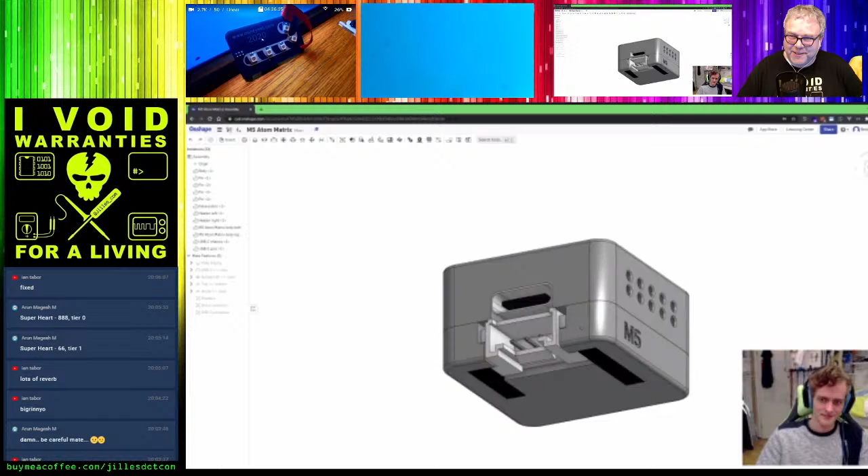Reinier already featured in earlier streams. He was watching a lot of streams, but at one time Boss Sebastius was designing his thing, and Reinier thought, I can do this much better. So he picked up his own gear and started creating exactly this one. Before the end of the stream he had even a better model than we featured at the time. But it's fixed, thanks Ian for confirming.

Really value that. Reinier, could you introduce yourself?

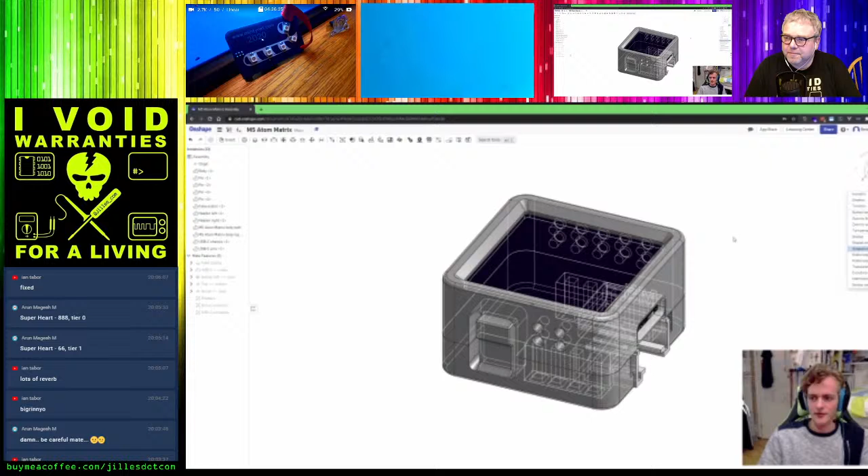So, okay, we have an object, in this case an M5 Atom, not sure where I left it. And then, well, how do you turn an object into a computer model? We did it the easy way, we just downloaded a 3D model and turned that into the device itself, I believe. And you made it entirely from scratch. Yeah.

I thought it was a nice challenge, and then in the end I thought, I've come this far, I might as well finish it. So it's not that many steps, if I may say so, but the art is in dissecting a model into small steps to make nothing into a 3D model.

You'll see in a second how such a process works. In this case, we're going to design something from scratch, but here it was also a lot of measuring and making sure everything's accurate and looks accurate when you render it. And then in the end, there's a lot of different components.

You turn all those components - the Grove connector was a model in itself - into an assembly, which is basically: this part connects to this part. They may have or may not have freedom of movement in certain directions or dimensions. By specifying those, you can make a model which can be pulled apart like this, and then put back together neatly.

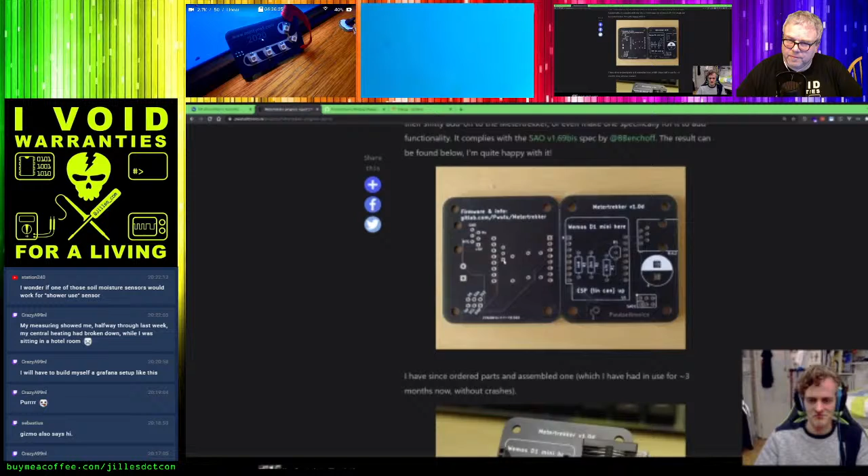Yeah, and then it's a lot of code, which I actually spent most of the time on configuring, to get a telegram and then parse it, but also verify it, because the telegrams containing the data from your meter contain a CRC verification. Oh, cool. Which means that theoretically you can verify the content of your telegram and see if it's correctly come through. Because in the beginning, as you may probably have guessed, this setup is not very fault tolerant. I had a lot of garbage data coming through, and the verification helped a lot with filtering that out.

But unfortunately, some early versions of DSMR, which is the standard that specifies the serial protocol, do not contain those verification tags. So those are a bit more wacky. Once the verification was working, it's just iterating and working long term and finding issues, and you're debugging multiple things at once.

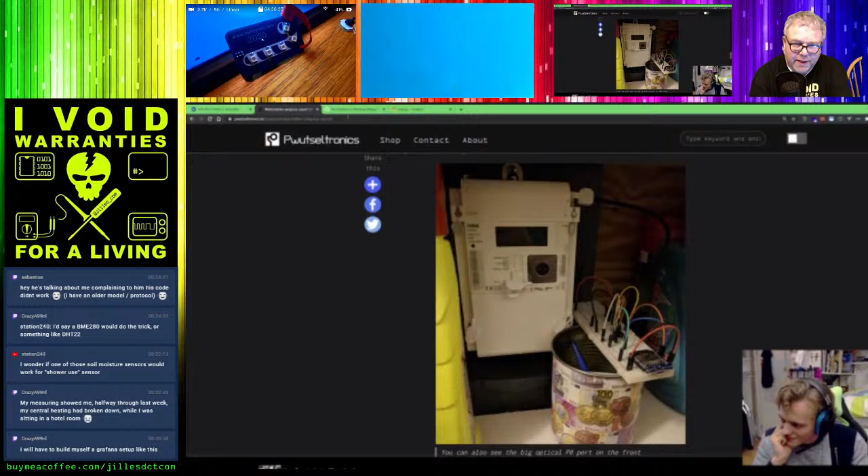Station was asking if you could use the soil moisture sensors, like the thing to see if you need to water a plant, as a humidity sensor, but Crazy already replied to use the BME or the DHT. I have the same thing.

With breadboards, I really love them, but over time, wear and tear, different Dupont cables, extending pads, turning them into a capacitor - it really introduces other problems. As soon as you make it definite, by either using an experimental print or designing a circuit board, all these problems vanish. That was a really big thing indeed. In the beginning, I thought this would never work reliably because of the amount of errors I was getting, but just turning it into a PCB helped so much.

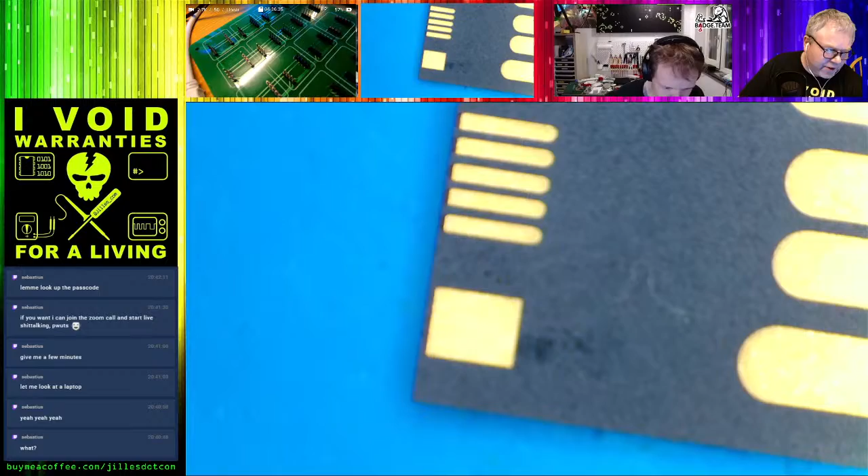I had a lot of fun a few days ago repairing someone's USB stick thing. It's recorded, I hope - I have it, but I need to rip it from Twitch and put it on YouTube. But the gist of it is swapping a controller sometimes works.

So Pwuts, do you want it in your email, WhatsApp or Telegram? Is Telegram okay? I can just chuck it in Telegram. Fine, cool Pwuts. Good to hear your voice, Sebas.

Why does the flip dot behind you never move? I normally don't run it, I can switch it on if you like. I normally don't run it because there are still some bugs to be worked out, and I'm fearful one of the bugs will cause a condition which will burn and cause smoke. But here you go. Whoa, and it's also pretty loud. Yeah, I got that from your sound.

But yes it moves - is it remote controlled? It's currently just on one of those IKEA Trådfri relays, so I can just switch it on and off, and it just does Game of Life. But it has an ESP32. At a previous point I just had a smaller panel in a frame where I could play Snake and other stuff on it, so I'm hoping to get back to that, but not at the moment.

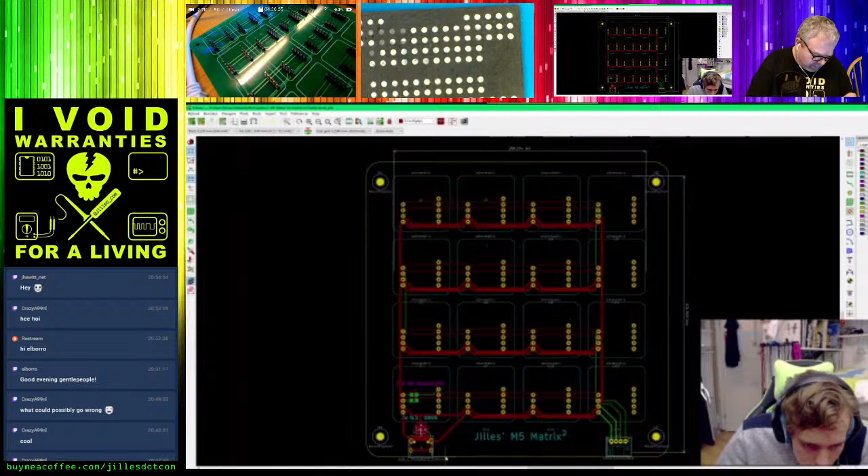Okay, so this one is. Hey Joseph, welcome. I saw you had some cool circuit board coming in for your new war driving thing, is it working already? I did not have time to read up on it.

So on the top it's 6 millimeters, in between it is 4, on the sides it looks like 10. And on the bottom, well first I'm going to make a square of. Let me see, you need the entire size? I already got it, I think, 130. Yeah, 130. Your PCB works, cool.

Still haven't got the package with the stuff right. For some reason sending stickers over to the UK takes just a couple of days, but sending a package will take forever. Yeah, but the UK mail is not the fastest internationally. Royal UK mail, yeah.

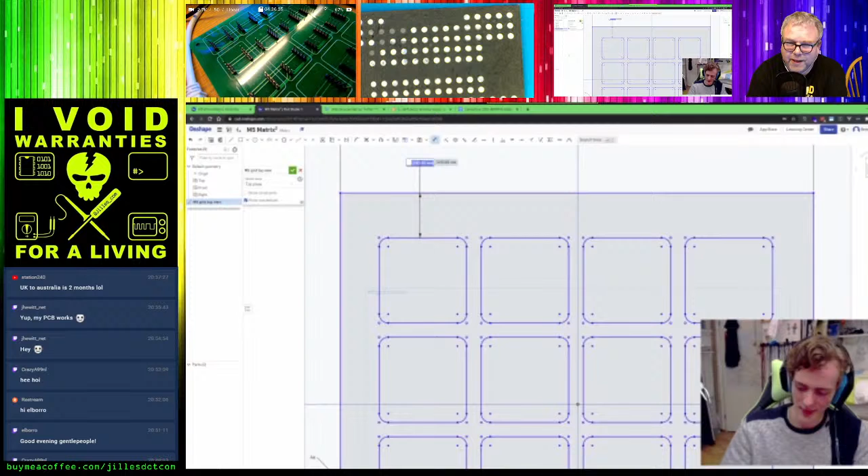I'm not sure what the paid licenses cost, but that's not really my concern. You can use the free version for simple stuff, but don't design your vault in it, not unless you have a paid license. But then again, if you're designing a vault, you can probably afford it.

It's sad that we're getting good open source and free circuit board design software, but 3D CAD is yet another completely different ballpark to play in. I haven't found any open source software yet that can do stuff at the level of Onshape or Fusion, or any boring Windows tool. Too bad. It's getting there, but it's just not done.

I don't mind paying for stuff, but needing another subscription for things adds up. It's like the same thing with streaming: you used to have just Netflix, then it was HBO, then Amazon Prime, and now Disney, and it adds up to something that's not funny anymore.

Besides the subscription model, which makes sense sometimes but not always, the main thing for me is I want to share my projects and be able to access my work ten years from now when the software company has moved on. With open source software, you can just keep an older version and keep working with that.

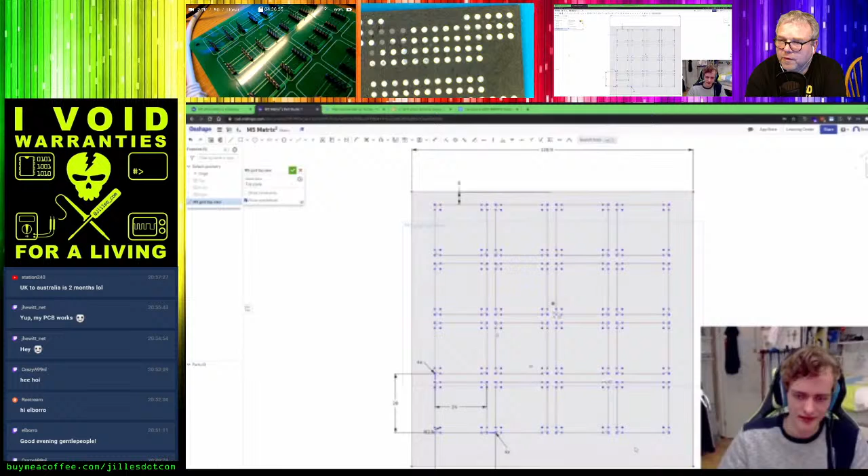So I'm going to move myself out of the way again because I'm blocking my view. Now I'm going to do a trick—not really complicated, but still important. I want this to be centered. Of course, you can center the grid and center the square, and align them along a common axis so they are both centered with respect to each other. You can also use construction lines, which I'm going to do.

So are these grouped? The grid of squares is grouped, but other than that, no, they're not grouped—you can see I can move this around. Now I'm going to fix that by adding constraints, construction lines, and dimensions. This construction line isn't a line that divides two parts of a surface, but one you can assign dimensions to. In this case, I'm going to add a construction line on the other side as well.

Then I can just say these two need to be equal. Okay, and that centers the grid of squares within these boundaries.

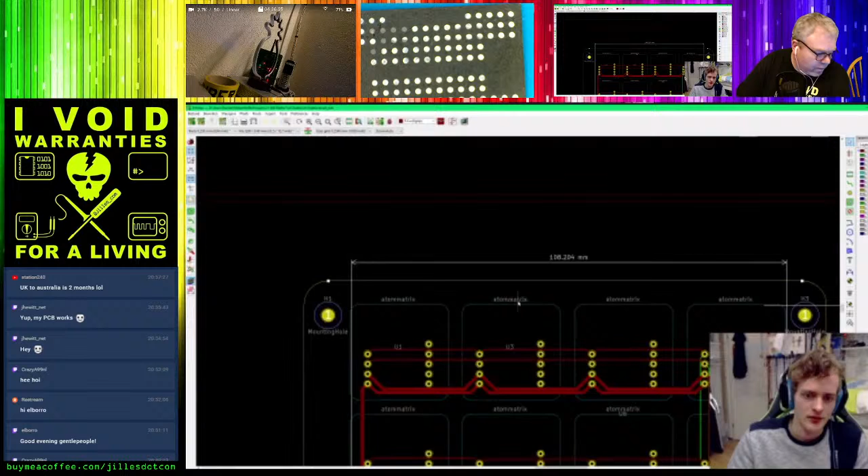Sorry, Rainier, Jilles, do not trust the symbols I drew on that PCB. The pins are aligned, but the blue lines are rough estimates.

Let's see, I want to know what the radius of this corner is. It was 6 millimeters.

So what is a good way to measure the radius of a corner? Usually I just do it freehand. Put the caliper on the, well, is there something I can demonstrate with? You basically put the caliper right here at the point between the straight line and the start of the curve. Then I measure from this edge to that point, and round to the nearest logical number. Often that gives a good estimate or good measurement. So like if you get 2.45, make it 2.5, and it's probably correct.

There are also tools available for this, probably called a fillet gauge or something like that. You can just buy them. I'll have a look, and if I find any, I'll put a link in the chat.

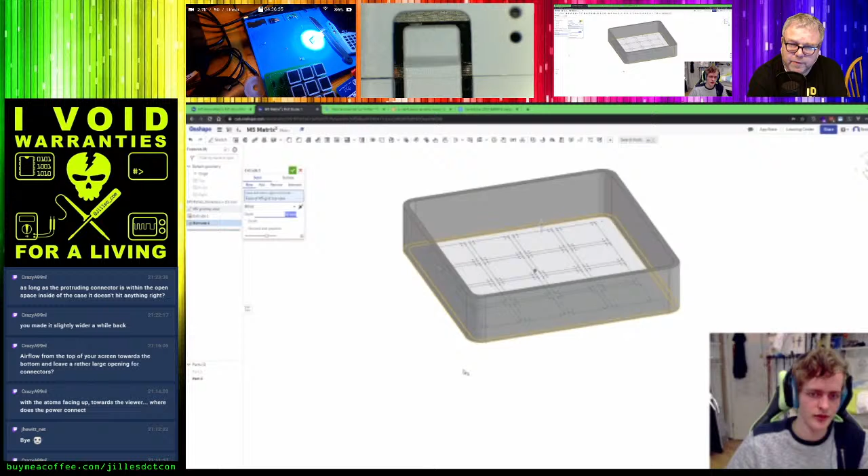Okay, I could probably better name these. So, bottom surface. It's not always necessary, but good for future reference.

I've hidden the bottom part, and I see it's not attached to the part I already had. So you can either create a new object with this extrude, or you can add it to an existing part, which I want to do now. Making it one thing. So now it's one part.

And then I'm going to do another extrude. Now just this surface, the grid with the holes.

Yeah, and I want it to be - well, let's see, starting from the surface we need, say, 2 millimeters space below the PCB. Then how thick is the PCB? Oh, whoops. 1.7.

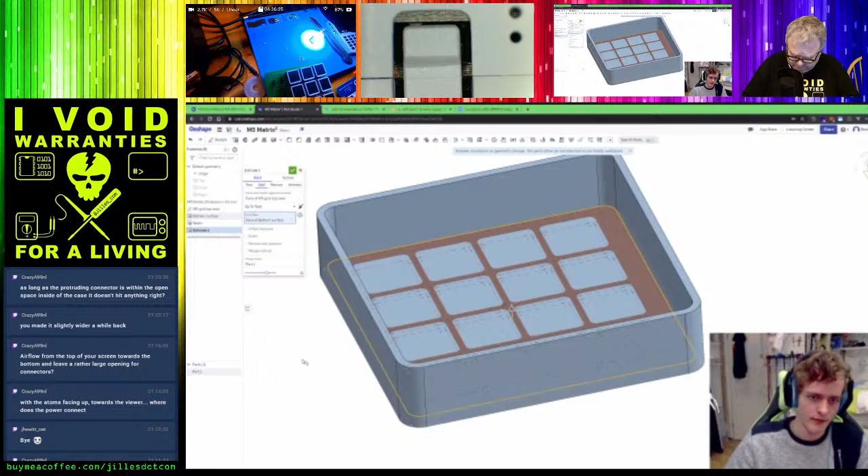Did you take the spacer into account? What spacer do you mean? The black part, so if I'm... Oh, the spacers on the header? Yeah. Oh right, how thick are those?

Actually, so if I take it to the top, from the bottom of the circuit board to the top, it is 18.2 millimeters. And that's excluding the bottom parts, soldering joints, and the capacitors. Because it's the black part as well, which is like - but there's also some spacing because it does not entirely fit. So it's 2.5 millimeters.

That is for the black part of the pin header.

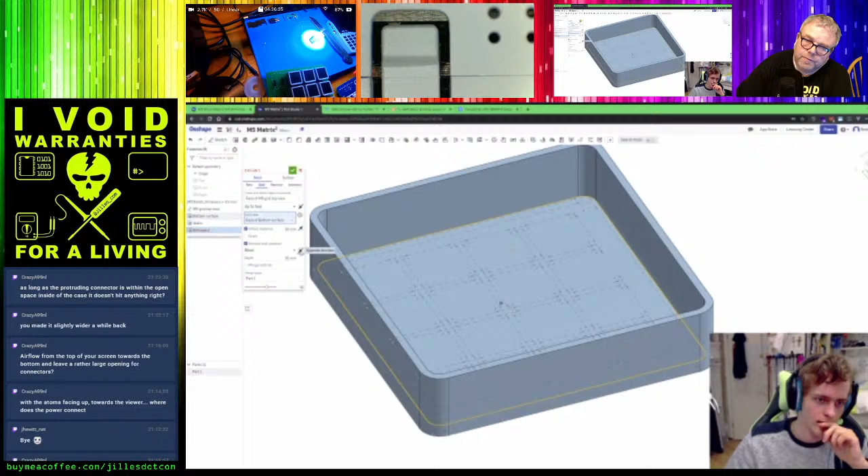I am now trying to get it to do something with the relative distances. Ah, look at that. So I'm just saying, okay, starting from the surface we just defined.

Go up 35 millimeters, and that is the top of this surface, and then there's a second extrude which I still need to fix, because this is going to also be relative from the surface.

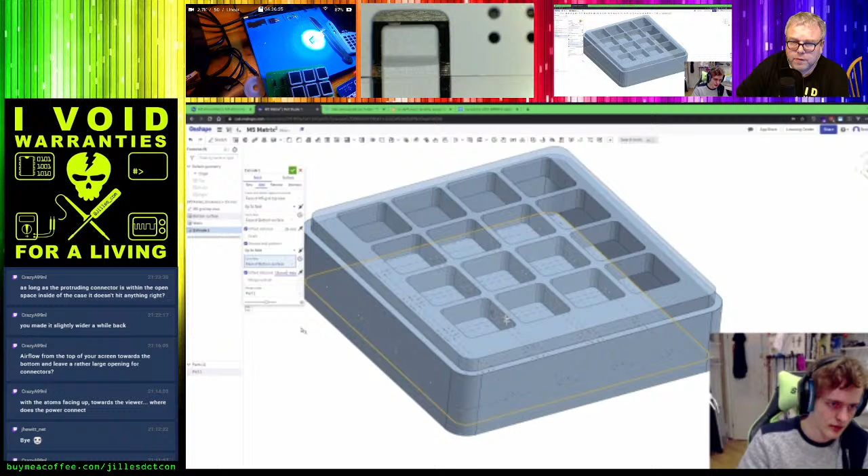And then with an offset of, well, what did we say, 18? So that's 18 millimeters, and then minus the shell thickness. And then this one is going to be just the 18 millimeters, and that gives us the top and the bottom of this surface at the right place.

Now you can see that I extruded the walls a lot too far. So how are you making the top one fit in the bottom part?

Already given that a thought, like having a rail or some clicking mechanism, or I haven't thought of - well, I've given it a quick thought. I think the easiest is to make them screw together. With some extra work, I can also make it a clicking mechanism, but that's tricky with 3D printing.

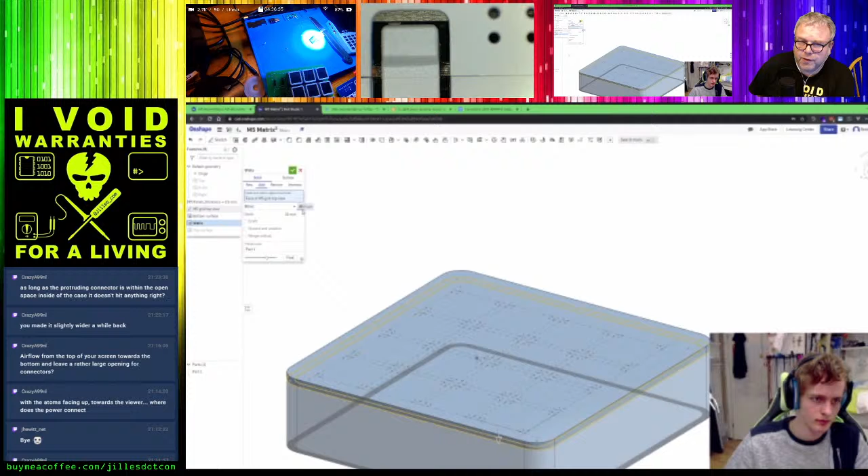Yeah, that will wear out. So it does wear, yeah. But if you are going to screw it, then it should not be screwed into the plastic, but you need to do it like a bolt and nut type of way, so that you can disassemble and assemble it without wearing out the plastic parts.

Well, there are these metal inserts you can use for screwing. Oh okay, yeah. But also, depending on the material and the exact tolerances of the screw holes, it is possible to use wood screws in 3D printed plastic. It may be a bit tricky with harder plastics, but I've done it on multiple occasions and it does work.

Yeah, but I expect that you need to take it apart quite a few times. Yeah, so in that case, metal inserts for screws might be a better idea.

But as you can see, we now have a very basic shape. And then you can, along the edge, add something to clamp the PCB. Yeah, I think it's easier to just add things to screw it to.

Yeah, you could screw it to the bottom plate, or like there's already 4 holes in the circuit board itself, or you could use a rail on the top plate to fixate it, to put it in place, like having some sliders to the side.

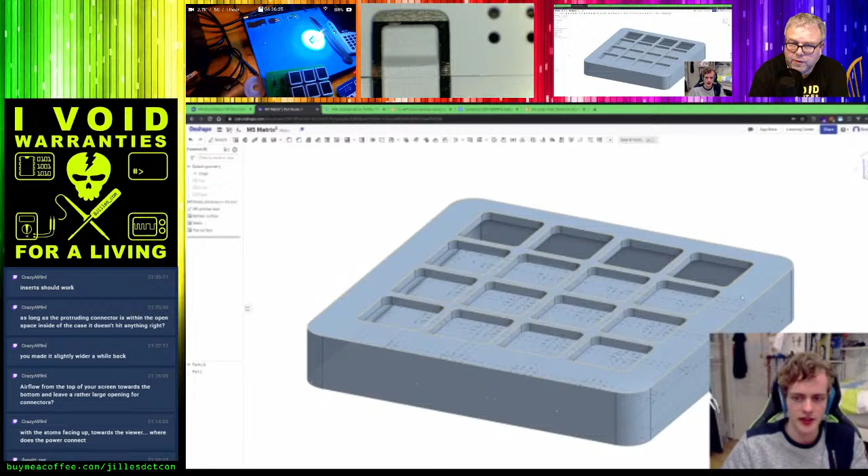Wait, you mean like something that goes over the top of the PCB to keep it down? Or so what is the top and what is the bottom? Is the bottom part being screwed, or is the top part? Yeah, I expect the bottom part. Well, it depends on what you want. Yeah, okay.

I would suggest having the bottom be the base, and then let the top be something you can take off. So if you take the top part that's removable and add some rails to that, around the edges—like 4 edges or around every line on the sides—that would keep it in place. Otherwise, you'd need to screw them on the top.

First, I think I'm going to split these into two separate parts, so that you have a top and a bottom part. That's probably easier for tinkering purposes. You could also use cylinders on the top part that would directly screw the bottom part to the PCB, so you have poles sticking out of the top part, and you screw through the bottom part through the PCB into that. Yeah, that's also possible.

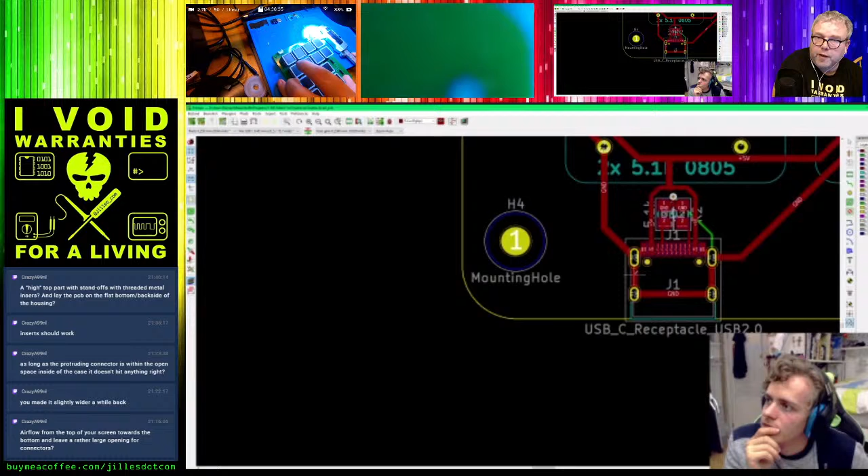Let me show what I exactly mean, because things might be lost in translation, as I'm probably not using the right terminology. So I'm measuring like this. I think I've got it—from the center to the top, and probably also to the bottom, at 8.75 millimeters. Oh yeah, center. Let me check here if it matches somewhat. Oh, it seems to be a bit different here.

Crazy states a high top part with standoffs with threaded metal inserts, and lay the PCB flat on the bottom backside of the housing. Yeah, it cannot be laid flat on the bottom—you need cylinder top parts on the bottom as well, since there are components on the bottom. So you need standoffs on both the top and the bottom, and make sure the PCB fits between that, with respect to the dimensions, so that the height of both standoffs plus the thickness of the PCB is equal to the space between the top and bottom surface in the model. Yeah, make sure it fits.

Is it fit on the—so the top part needs to be on the top, so it should not be an inlay in the top. It should be on top, otherwise it won't hold. Wait, are you replying to the chat? No, I'm just thinking out loud. So the top part is not only a flat part, it also needs some sides to align to the inside, right? Yeah, so it won't misalign.

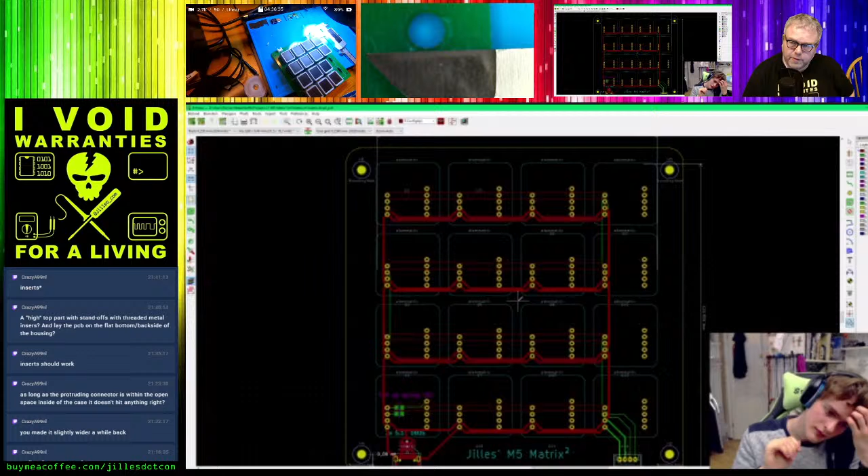I'm trying to design this housing such that the PCB fits exactly inside the walls of the housing. That would mean the alignment is done by the walls, and then you have the standoffs for fixation. But that would be harder due to parts sticking out, like the USB-C and the Grove connector. What do you mean harder? I mean, if the PCB is at a fixed position in the housing, then I could just create holes in the housing so you can access the Grove connector and the USB-C connector.

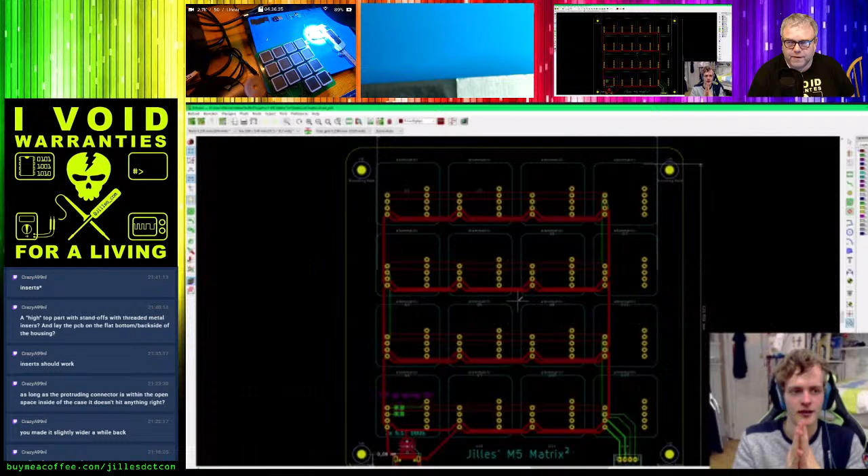I thought you centered it by aligning the walls against the outline of the circuit board, but that's not the case—you're aligning it using the screws and cylinders. Well, yeah, it's kind of both. If designed correctly, they should both fit exactly. There's of course a bit of tolerance, but yeah. I think it works for the sides, but the bottom part—yeah, you need to have a cutout on the connectors, and then...

So let's see, this is the center point of one of the screw holes. It's 8.75 millimeters on the top, and it's—let me see—smaller from the sides, 5.95. It doesn't come that close, but hey, why not. And Crazy is stating that the USB connector might actually stick out of the box, so it's not only the connector, but also the connector that's put into the connector.

So the bounding box with connectors is larger than the PCB itself. Yeah, that's true, but that should be solved by just making holes for the connectors, which is needed anyways because you need to be able to access the connectors even with the enclosure closed, for external power. We are not yet designing a battery pack into it, it would need to be quite large.

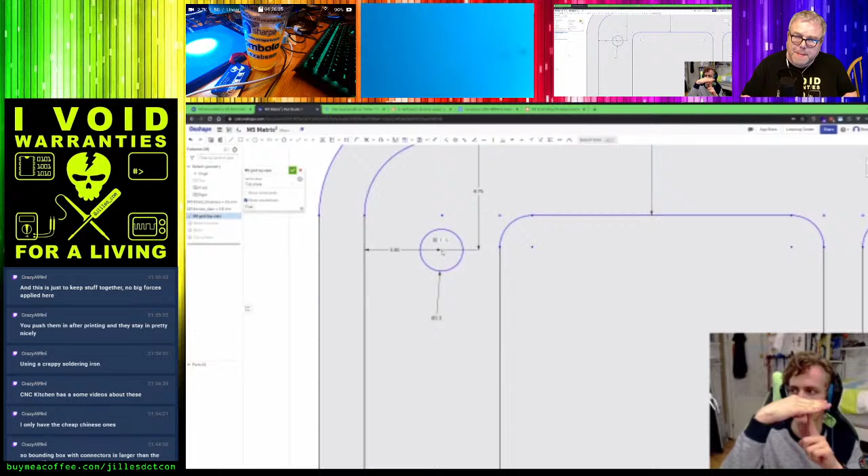Then there's the PCB with the hole in it, and then there would be the standoff with the insert in it, which you screw into. Then we need another circle on all 4 corners for the actual pole of the actual standoff.

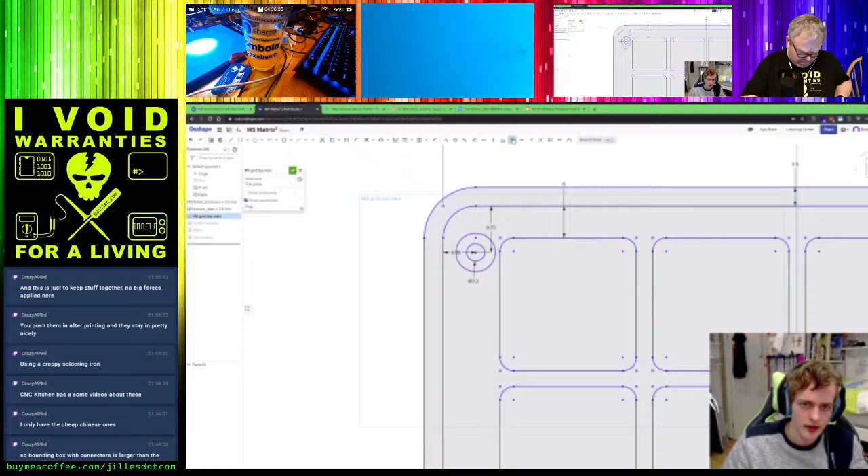Okay, so I think I got it now. On the left side they are 4.5, and on the right side they are 4. What dimensions are you? That's like from the outer side of the circle to the outer side of the board.

Wait, then it's not symmetric. It's not symmetric, huh, interesting. Oh, I can also see it in the drawing now. Huh, okay.

I mean, it shouldn't be an issue, but then let me see where the difference is, because measuring from this outer circle to this corner, I see an X difference of 2.08 millimeters. And then on this side, from this corner to the same circle, it's 1.12. So it's probably there that the difference is.

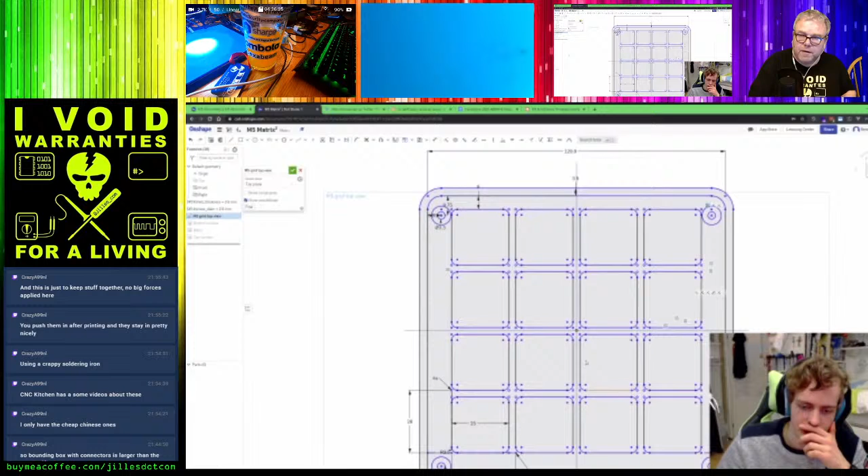That might also mean that I cannot assume everything to be centered. Okay, so we can just delete these because they're not useful anymore. No.

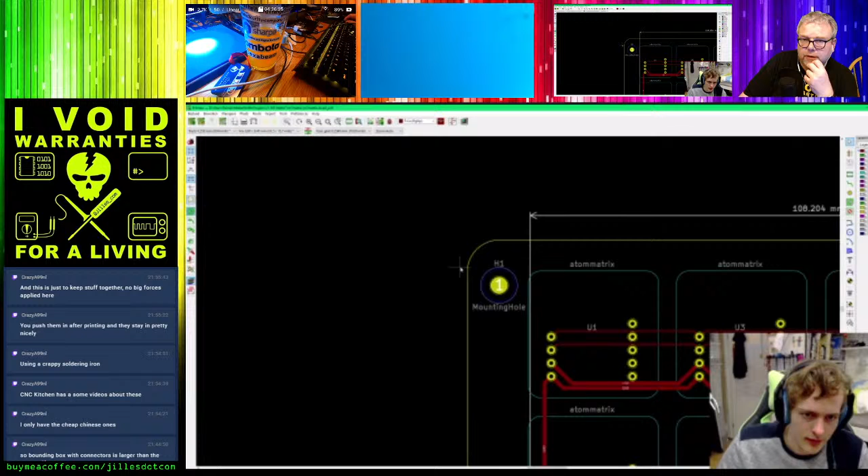So if we let go of this and just look at the outside of the board. Okay, so I need to re-measure the placement of the holes on the right, because the holes on the left are still accurate. I use those for reference.

Yeah, so these are going to be at x 5.33 from the edge, and these are 5.95. Yeah, no, those are not symmetric anymore. And this one isn't either. These are aligned though, perfectly.

And then I can just redesign the PCB to make it all symmetrical, nicely centered, whilst Sebas isn't looking. Well, I could, but then the PCBs that have already been fabricated wouldn't be of much use, and shipped and set up.

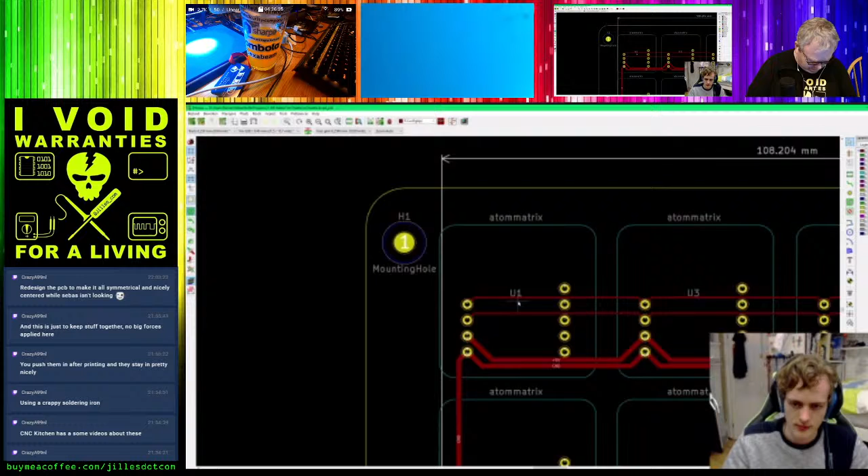But on your PCB, are the M5s within the lines? Yeah, but they are more to the left. So yeah, they are within the lines, but they are to the bottom left. Okay, so there's some spacing left on the top and the right side.

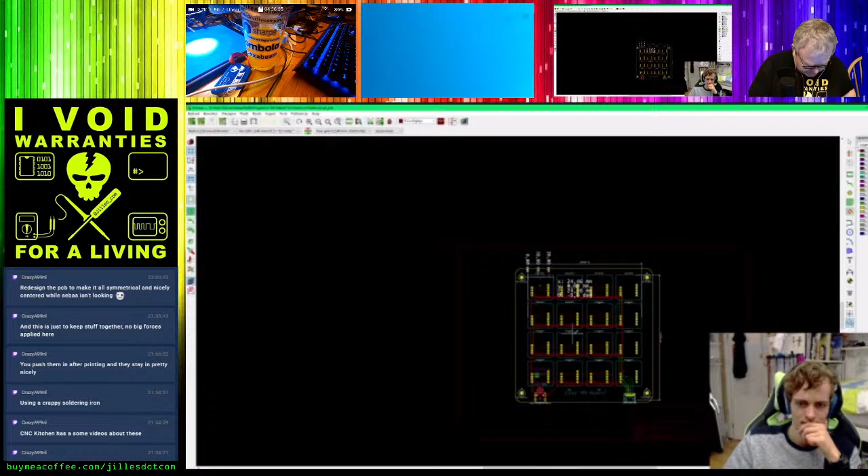Well, then it's a bit hard to use these files for reference because apparently they're not exactly accurate. How large is the difference? Yes, really tiny, like 0.5 millimeter. That shouldn't be too much of a problem, I think, because that's also more or less the tolerance. Yeah, 0.53.

So then I am going to take this distance, which is 9.91, and this distance, which is, well, what is it? And just subtract some. 11.37. And then this should be around about 11.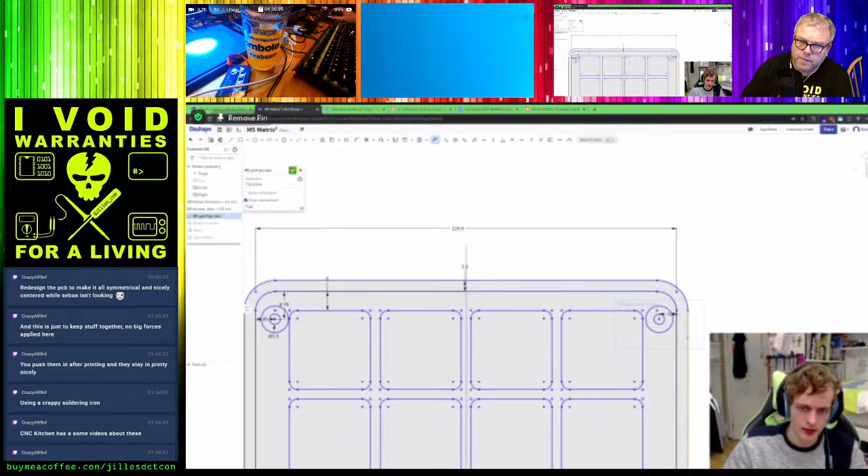Now this is of course just kind of guesswork, but part of the trade. And then what's the distance we come out on this side? It is 9.9.

As you can see, working from an existing object or design is a lot harder — a lot of constraints and not that much actual drawing and designing. No, but these are like the real life challenges. So if you know that you run into this at the end, then you think about designing your circuit board in a different way. Yeah, definitely.

So I was not thinking about this as well. Like for me, symmetry was all about beauty and not about 3D prints. Yeah, but symmetry, it's aesthetically nicer, but it also helps with designing. Yeah, I understand, it's that simple. Yeah, and I think this entire process makes it even more clear.

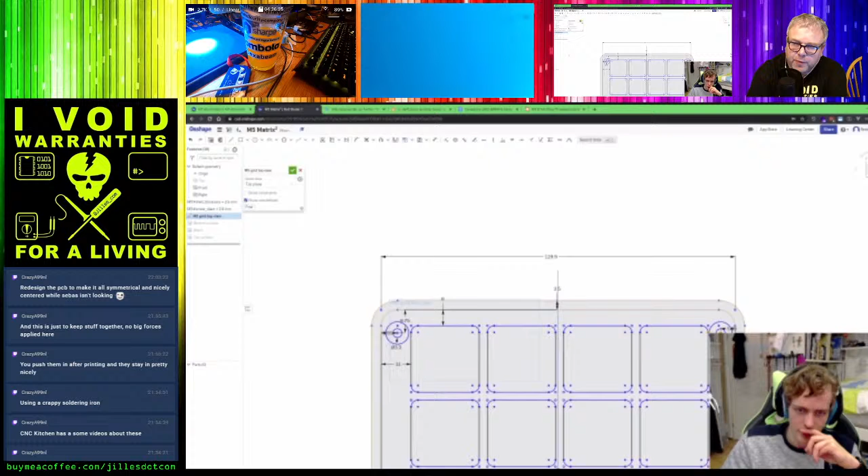So you have not much space between the cylinder holding the... yeah, that's not that much of a problem. I mean the holes that are in here are for the screw that goes through the bottom. And then I actually still have to draw the circle for the inserts. Might as well do that now.

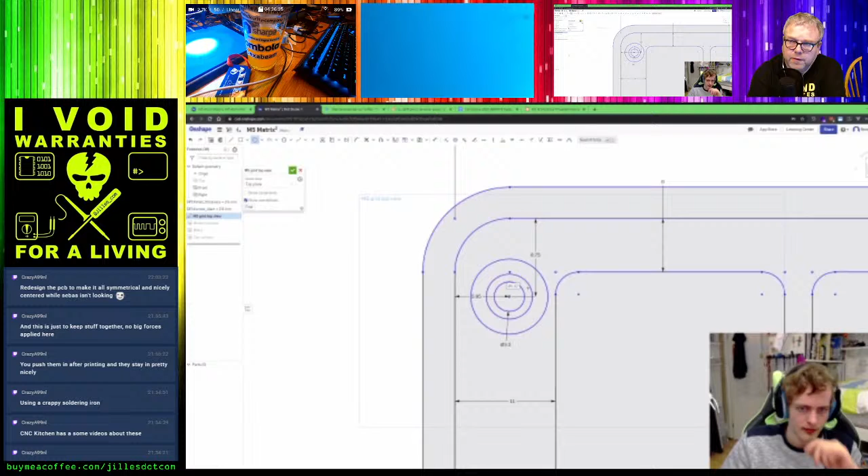Because the inserts are, well, it said it somewhere here: 4 millimeters. So it's not that much difference. And it's an M3. So I'm just going to assume these inserts — can of course change later — these are... I actually have some inserts lying around here, 4 millimeters, they say, suggested hole size. So I'm just going to do that.

As you can see, these are going to be a lot of concentric circles, which is a pain to select all the surfaces when extruding, but it's just how these things work. I'm going to select one circle and then all the others to say, okay, these should be the exact same radius.

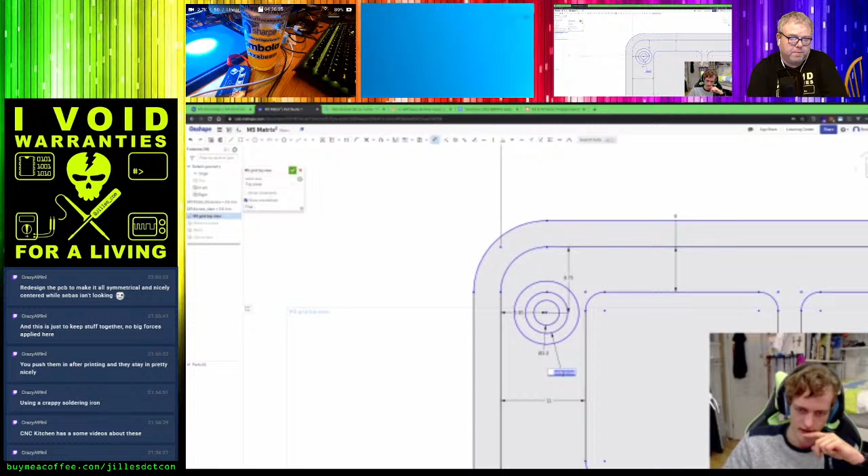And then assign a radius to one of them. I think I'm going to do that here as I've done with the others. That's going to be 4 millimeters. So as you can see, there's not much of a difference. I think I'm going to make it a little bit bigger because often 3D printers make their walls a little bit thicker than in the design.

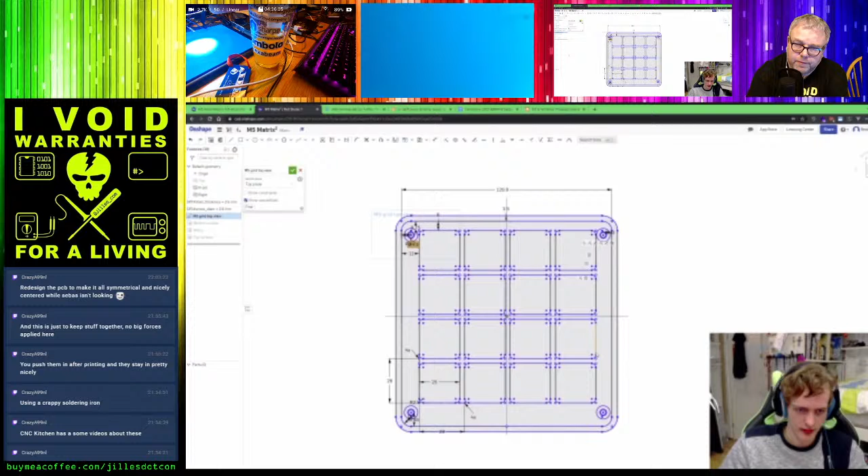Well, the diameter of the balls is not really that important for definitions. It's important that it doesn't intersect with anything else. But right now there is 0.6 millimeters distance between these two, and that should be enough for tolerance.

And what I can now do is, well, first show you what happens when you edit the sketch on which an existing extrusion is based. So I'm now going to have to select all the extrudes and add the missing surfaces.

So this is the bottom plate, or this is the top plate? Bottom. This is the bottom.

To prevent this, I could have made a new sketch on this surface, so I can just extrude everything in the beginning, and then later make a more detailed sketch for the holes and fix that. But in this case, I wanted to simplify the extrudes themselves by extruding everything at once and then splitting the two halves. Makes sense, it's a design choice.

Neither of them are ideal, but they both work. So you need a hole in the bottom as well. Oh, that's a good point. Actually, I should remove the material from the inner hole at the bottom part.

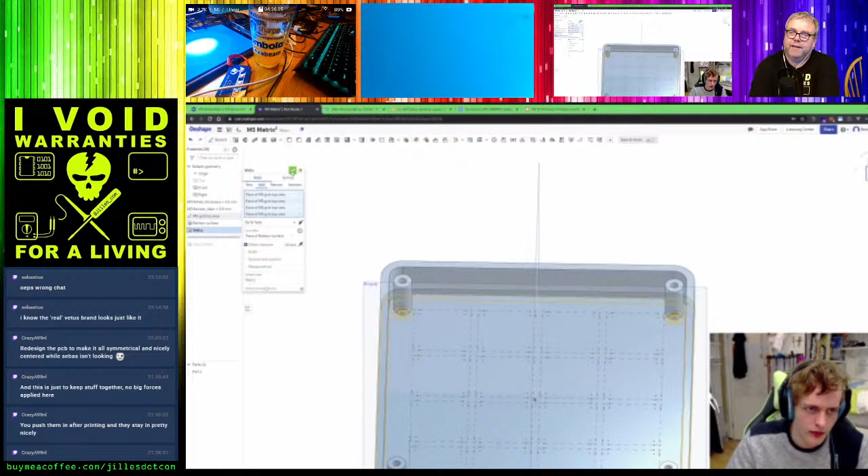Cool, so we're now going to add the standoffs to the wall extrusion. And then you can see that you have four little holes in the corners. Very cool.

And you can, of course, now they're still joined. This is the point where I am going to see if I can offset the... let's see. I want to duplicate the surface at a distance, and I think this is the right button for that.

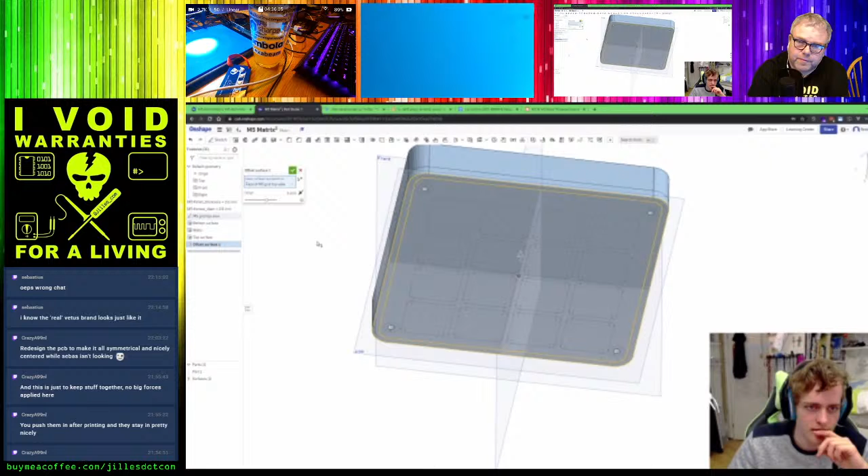I really like how this comes to play, all in now we're over 2 hours. Yeah, really like the process. Bottom surface.

Okay, so these are the surfaces that need to split, and then you need a cylinder on the bottom part as well for the distance of the circuit board.

So now we have... oh crap. What? Since I selected only these 4 circles and the wall, they have now been created into 5 separate surfaces. Okay, it works, but it's not convenient, so I'm going to roll back, delete that. It's possible to deselect, to disable certain parts or layers to prevent this from happening.

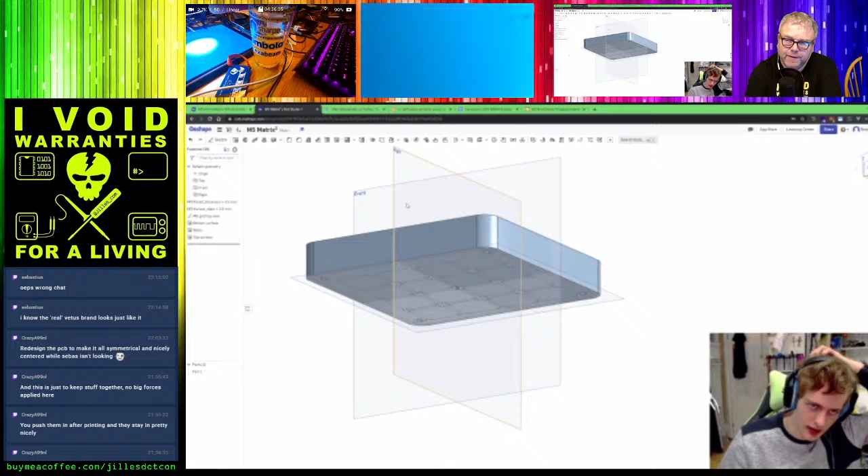Oh wait, this is again not exactly what I wanted. Yeah, this is more like it. I would like to offset this entire surface. Look, and now it's just a surface, because just a moment ago I was moving the entire face of the bottom up, which meant the part just retracted. And now I am creating an extra face.

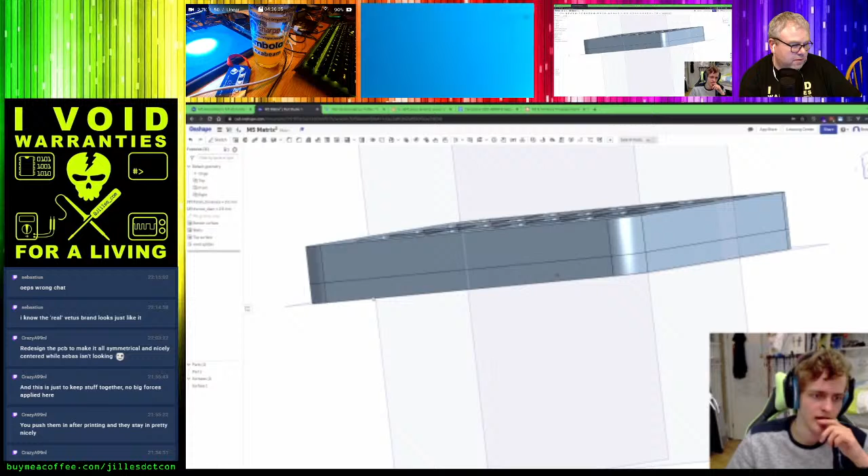So that's going to be shell thickness plus 4 millimeters, we said, which gives us basically a tool to split the housing. And now we can do a cool trick, which is actually splitting the housing using this part, and the entity to split with is the surface we just created.

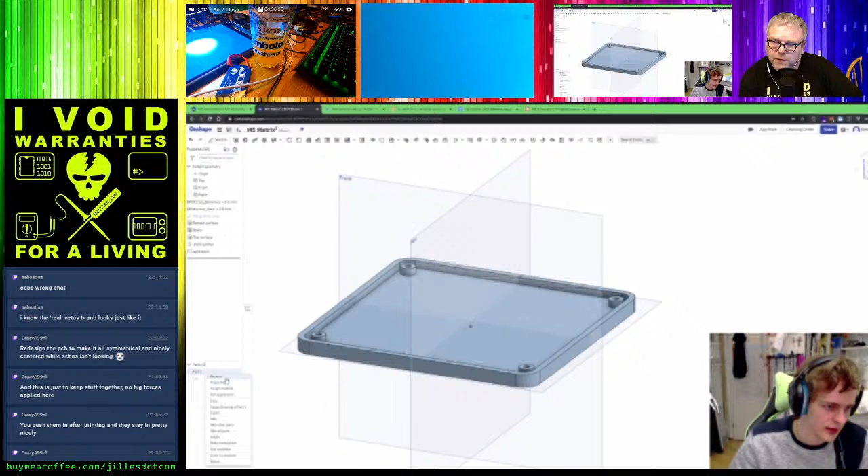And now we have a bottom and the top part, and we can hide one part and the other stays visible. So this is currently the top and the other one is the bottom, and now we can do what I was just doing incorrectly.

And say, where was the button again? Move face and select the 4 poles, and then what was the thickness of the PCB? 1.5. Okay, so I can move these the other way by 1.5 millimeters, which gives space for the PCB.

Now, how much do you still have left for the bottom part? 2.5 millimeters. Yeah, that's more than enough. Okay.

And then I'm going to create a variable with the thickness of the PCB, which is not necessary, but probably a good idea. PCB, which is 1.5, you said. Oh, oops.

And there. Then I can change this to PCB thickness. Now, of course, there needs to be space for the screw inserts. Not in this part though, right? Right, only in the top part, and it will be held together because the screws themselves are M3 and the holes are M3 as well.

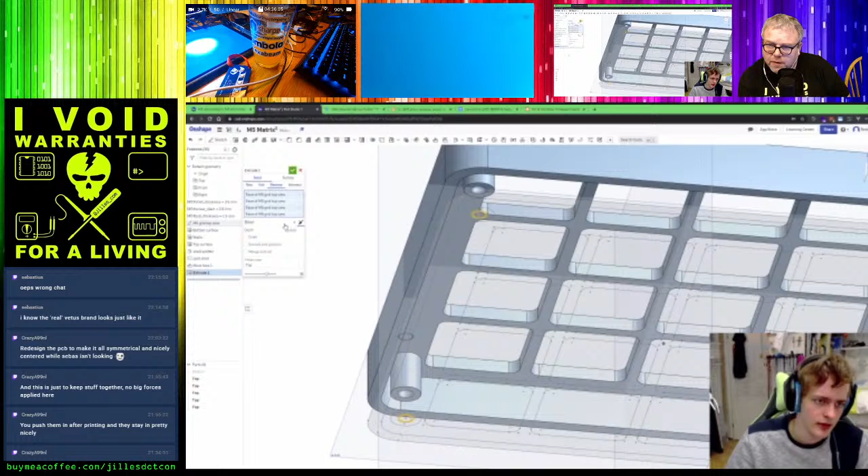It needs to be removed, in the other direction. Up to face, well, up to this face, and then with an offset, of course, because it needs to go in there. Of, let's see, okay, other direction offset. Now we can see it's removing material from in there.

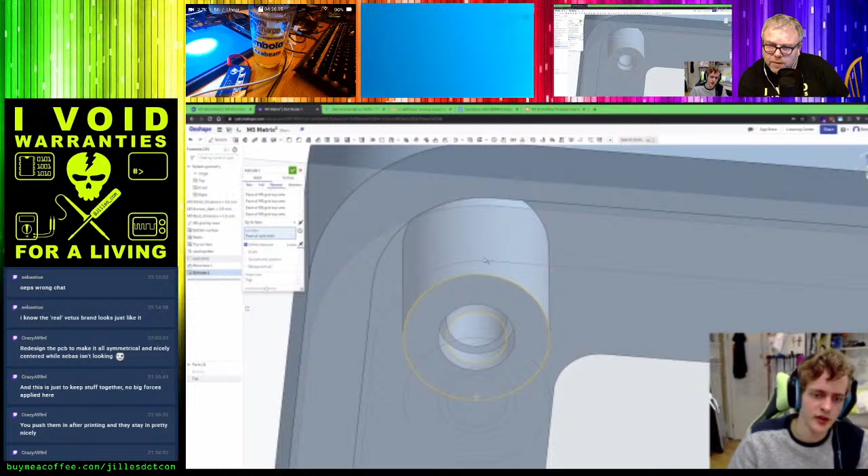What would it be, like 5-6 millimeters? Let's see, at least if it's specified. That's so much more, this should be 4. Then I think from top to bottom it's 6 or 8. Let's just make it 8 to be sure.

Do you have a link or something? Or I ordered a few, I have a box here. I can get them and measure them. Shall I do so? Yeah, sure. Can you also put one under the microscope? Yeah, will do, hold on.

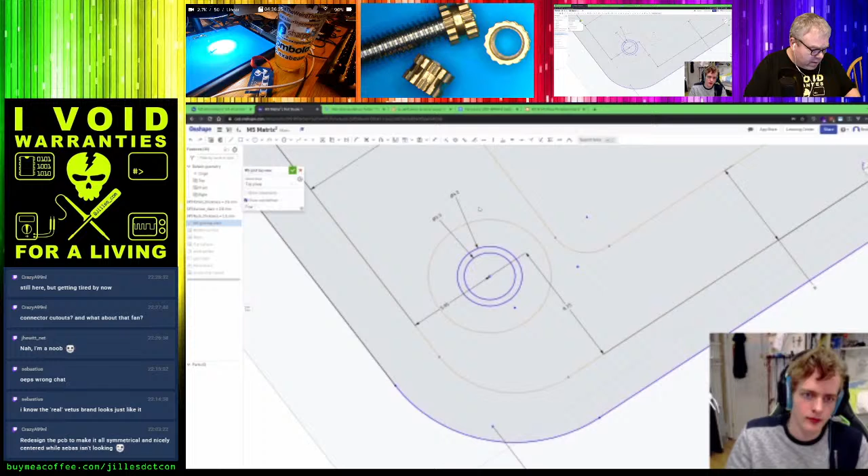And the height of it is not that high, so it's only 3 millimeters high. But then you don't need any insert kind of solution.

Okay, so then this can be. What was the height of the inserts? 3. 3. Okay, so I'm going to make it 3.5.

And then there's space for the inserts. There is an offset on the surface to accommodate the PCB, and there is also a hole in the bottom to stick the screw into. So the bottom and the top part are together. Is there a way to fixate that they do not misalign? Not yet, indeed, but that should be doable. Just thinking of a way to do that, like having an inner line and outer line, or...

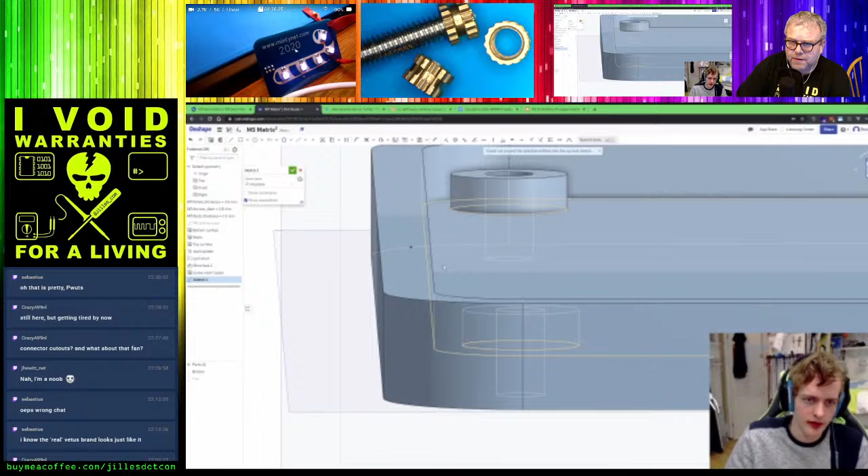Okay, I'm trying to get a reference point, this is probably okay. In my sketch, I'm going to project. Couldn't project, oops. Is one of the sides thicker, or is it just the way you see it? Is the outside line as thick on all sides? Because it looks like the wall should be the same width everywhere.

So I'm trying to get a reference on these lines so I can use them in my sketch. Except they're somehow misaligning - it doesn't really matter, it says could not project. Okay, so this is a useful reference point, and then what I'm going to try and do is make a sketch of a profile I want to cut in the side. Then I think I can sweep the profile around the entire wall, so you get a bit higher part on one side and a bit lower part on the other side. Cool.

Actually, this might be an alternative for splitting the shell. Except we've already done that, so I'm just going to see if this works.

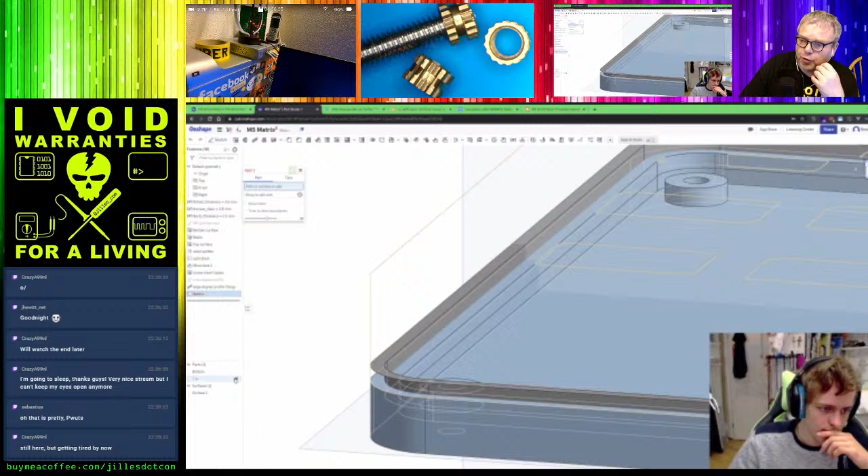So you don't have to do this for the top part as well? I suspect, okay, that I can select these two parts, and then I will just select the surface, and that should, it creates two new parts, so it works.

Liners or whatever, and then let's see what we have here. First, we have the bottom. Yeah, and you can see that it now has a cutout on the side.

And the rest is contained in these three parts, which has a lip. Right? I think you can see. Yeah, okay, so this now has a lip going around.

So we can kind of undo what was just done and do a union. Whoa, clicking all the buttons. Union these three, and we get back the top part. Right? Yeah. And now we have a bottom with a cutout and a top with a lip.

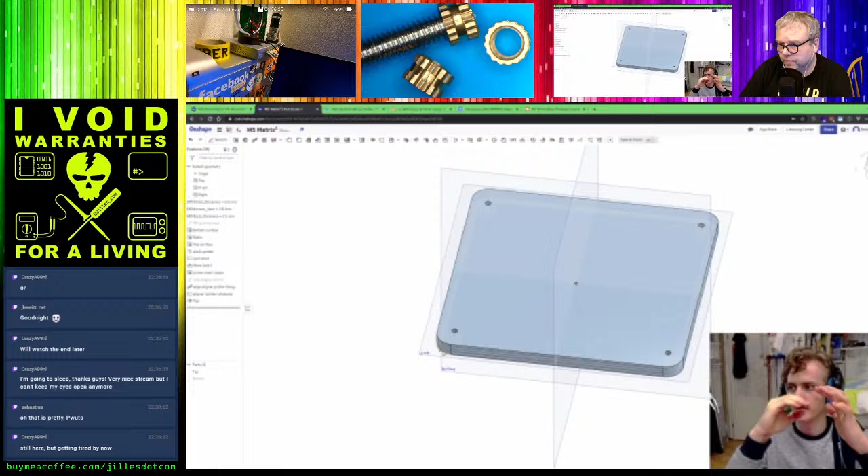Do you have those blockhead M3 screws, or are they like round heads? I'll show you. Oh, they're actually not that clear. These. So what's the diameter of those heads? That's 5.4. And the height is 3.2.

Just going to add more circles. Whoa, that wasn't supposed to happen. Alright, that's quite big. Then you need a thicker surface for the bottom to make it work, otherwise you go through. Because what was the thickness of those things again? 3.2, okay, that's pretty thick.

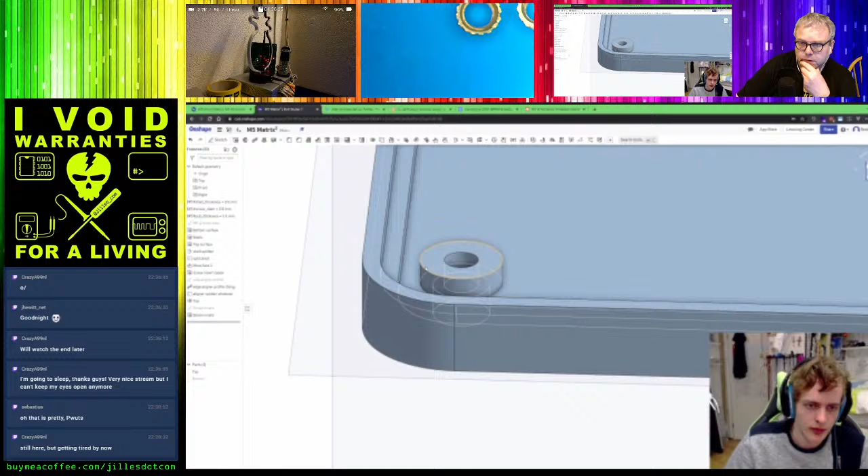It leaves, that's actually 3. Trying to find out what the distance is between the new inner. Okay wait, this has radius. Oh, diameter 8. This is diameter, that's cool.

Using the 5.5 distance as well. So there is 1.75. Oh wait, is that correct? There's 1.25 millimeters left on both sides. Yeah, here and here, between this and this one. So it's probably enough to keep it together.

This should work. So there's an inset on the bottom. Wow, there's space for the PCB on the top. So much detail. Now we have, well, it kind of looks like an enclosure. Yeah, just needs more holes, right? Both for fan and for connectors.

Whoa, whoa, whoa, whoa, what's happening? I'm going to use these screw holes as a reference, I think. Yeah, it's probably a good idea.

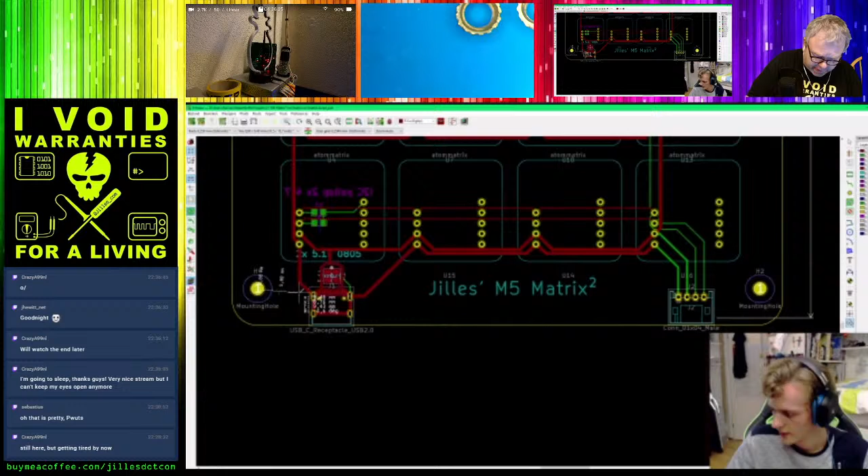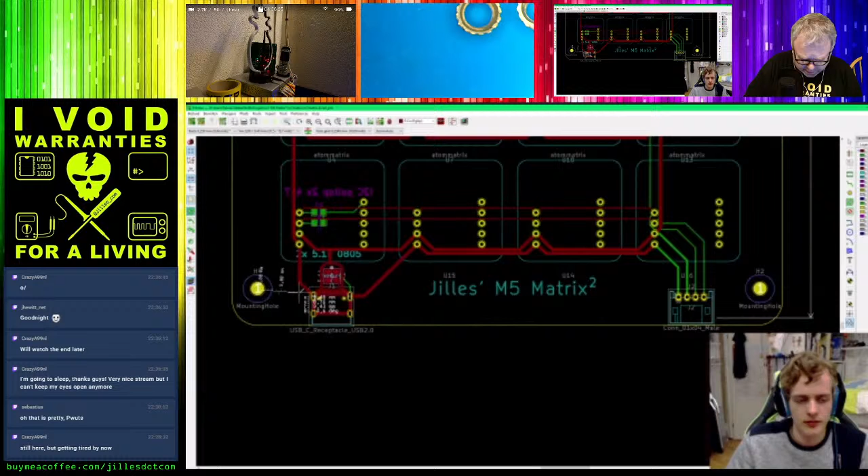Then how much space around the USB-C connector do you need? That entirely depends on the USB-C connector. I have one here, which is 10.5 and 6.5, but that's the plastic included. I would make it bigger as there's different USB connectors, like maybe 2 millimeters to each side.

Round it up. Let's see if I can find the center of this connector. Right there, 70 millimeters from the left.

Yeah, I could do so, but that's something you could use adhesive for. So Elbora is asking, are you planning on something like anti-slip under the enclosure as well? Yeah, there are these cheap rubber or silicone adhesive feet you can just put on there to keep it from sliding everywhere. That's probably the easiest.

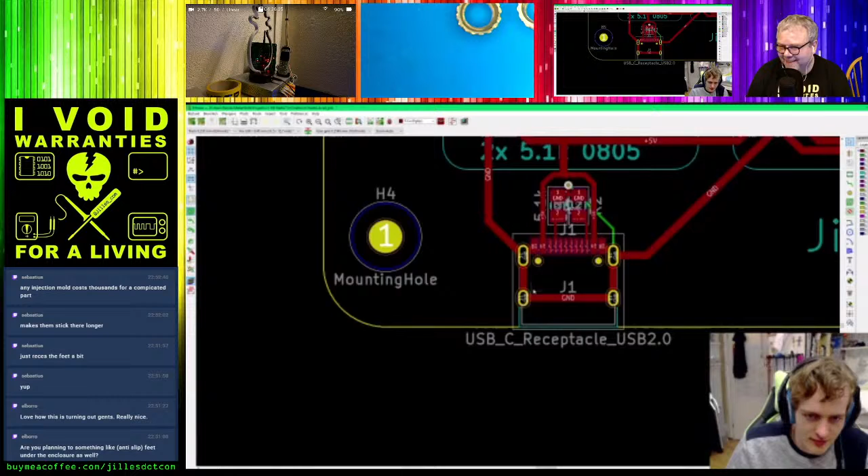Pun intended. Maybe. It's nearly 11. Anyone in the chat for whom 11 means bedtime?

17.5. Okay, so then the distance between these two should be shell thickness plus 4. No wait, the center needs 4 millimeter minus. Where's my? Here it is.

So, okay, this should be the right position, if I'm not mistaken. So the bottom line is the top of the circuit board? Yeah, and the bottom probably... No wait, I'm probably doing stupid things now.

I should use this as a reference for the position, because this should be shell thickness plus 4 millimeters, and that's the top of the piece. Should be plus 1.75 for the USB-C connector itself. Whoa. Yeah, okay.

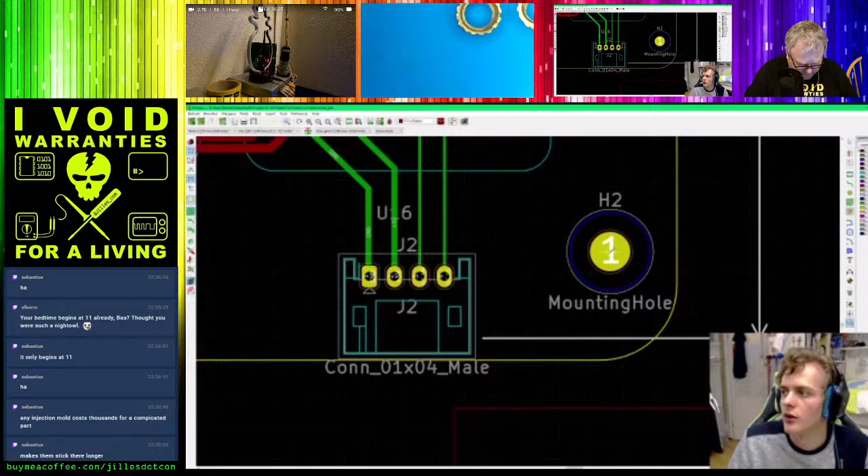Sorry, what? 3.65? 8.6 in width. What is it? 3.56 in height.

Is that for the connector, that part? I think I'm going to go with the outer dimensions of the connector instead.

Which is 10 by... And now I'm including the circuit board as well. 6.8. 6.85. 6.9. 6.9. But that's including the PCB. Okay.

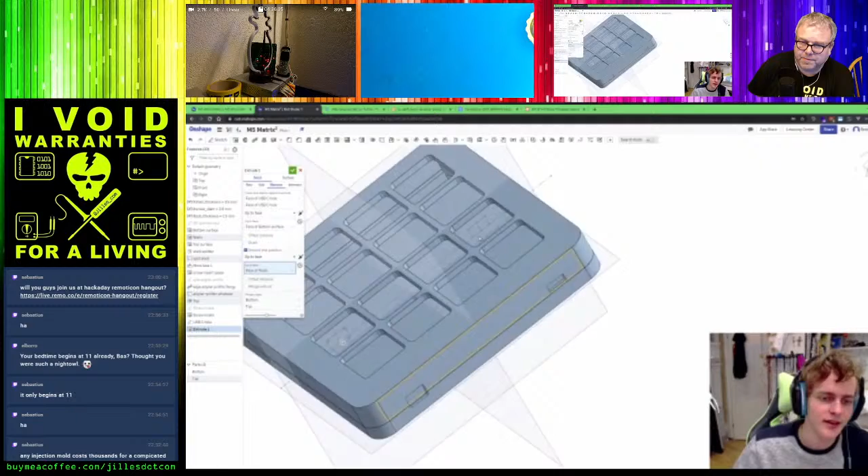And I should probably also define a second end position, which is the other side of the face on the other side, because otherwise if we make something in between here and here, it will just go straight through. It's probably not going to happen, but it would make for nasty surprises in the future and hours of debugging. So to speak.

Ta-da! Connector holes. Yeah, very cool.

So now this is going to be tricky with printing. I would just cut it off. Yeah, I mean the printer will try anyways, but if it fails, you can just cut it off because it's going to be behind the edge anyways. Correct. Yeah, and in the other part, it's just going to be a little cutout.

Now the only thing left to do is create some holes for venting. We can make holes in the back, the side, the top, the bottom. What do you think? I would say create vent holes

along the interspacing between the atoms. So there's 1, 2, 3 interspacings on all sides. Or what do you think for airflow? So there'll be 1, 2, 3 here and here as well, like on the same line as the raster is.

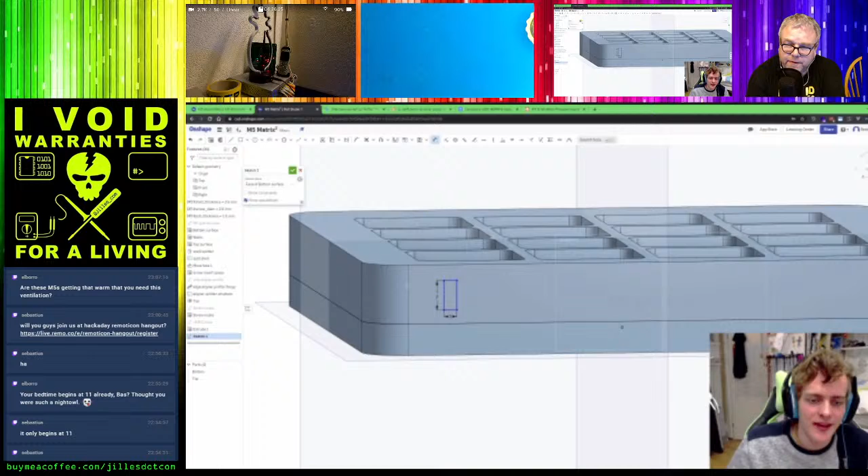Real fancy box. Yeah, I think I'm going to work on it a little bit more after we finish the stream. Anyone watching will probably see it on Twitter sometime in the next days.

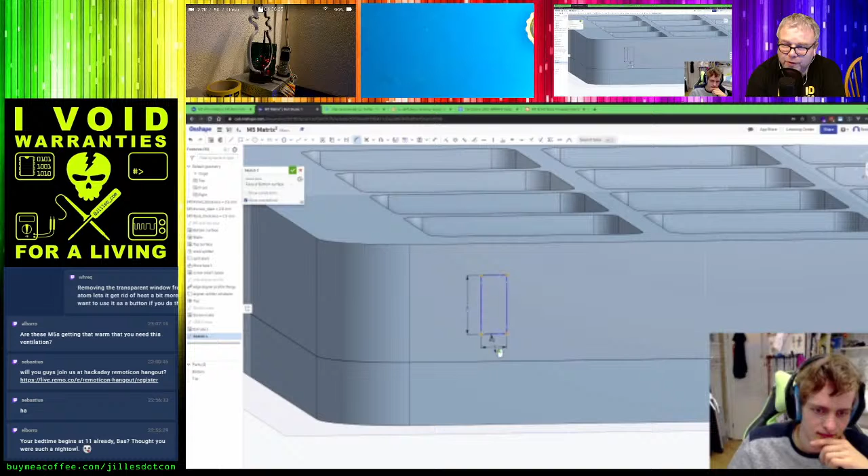So some inlays like we have on the atoms on top would be cool as well, like the tilted inner part. Like if you look at the atom itself, those are not flat on the top. So if you cut them out, have like a similar experience for the inside - not a straight line, but a slightly curved line.

Oh okay, you're saying something in chat - removing the transparent window from the atom lets you get rid of heat. Oh okay, yeah, but then you can't use it as a button anymore. Yeah, correct. Could do that as well.

Yeah, I haven't figured out the software yet, so that all depends. There might be a way to interact with the device by selecting functionality by pressing the button. So I think for now we're going to leave it on. But maybe it will be controlled by a different M5, like a Core 2 with touch - then you don't need that click functionality anymore, and then we can just take off the shields.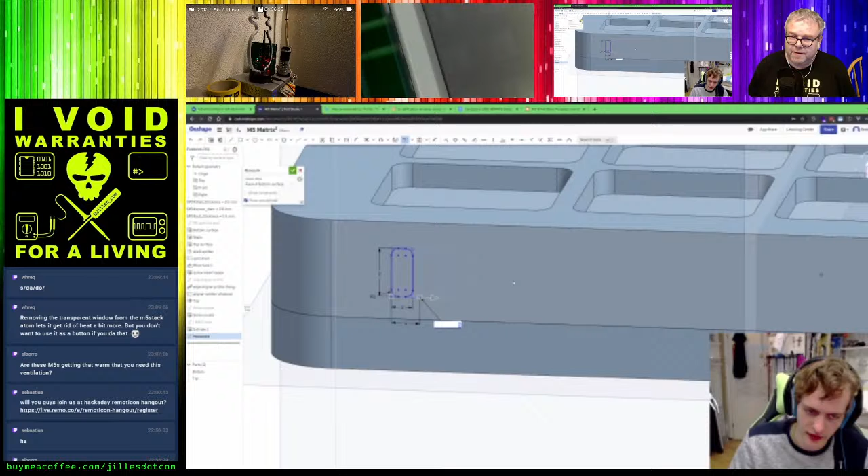Pattern of this, and then - I don't know, it's like an artsy view. How many do we want? As much as possible. Oh okay, so then they end up here. That's maybe a bit too much. A little bit less.

Yeah, you can still use that as a button, but it will also work like for blind people, feeling all the notches.

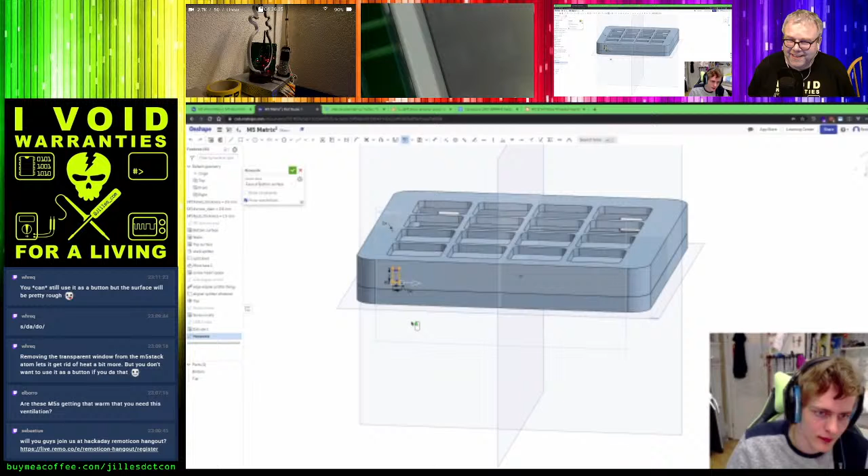Okay, how many will fit? It's like 8, 9. Well, we can do 4 groups of like 5, or we can just make it one big line.

Yeah, if you light up the LEDs, you will have heat braille. We already subtitled the screen, but we did not think about people that are having sight problems. Heat braille sounds like an interesting experiment, but I'm not sure I would like to be a test person.

Elbora is stating, as a finishing touch, now find a nice spot to emboss the Warranty Void logo. How about here? Do you have an SVG of that? Yeah, it's on my kit. Okay, I can just import that.

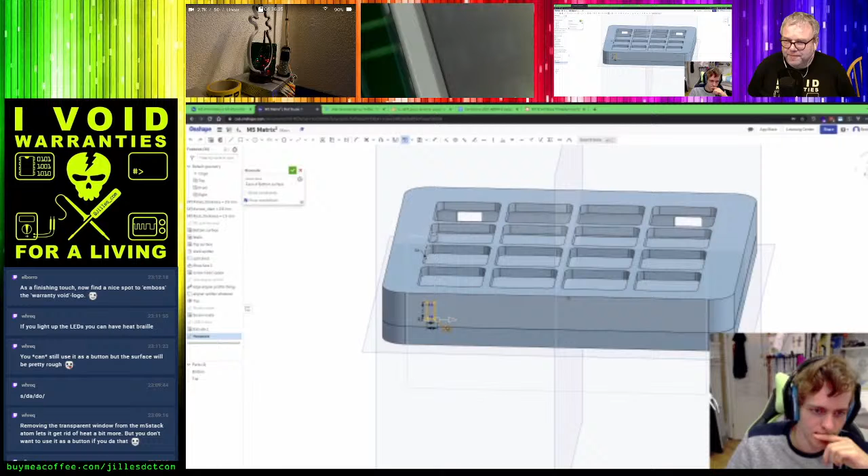Okay, so we want some airflow from here. But I just used the OCR logo, so - OCR font, no, not for this one. This is what is the Arial bold, I think.

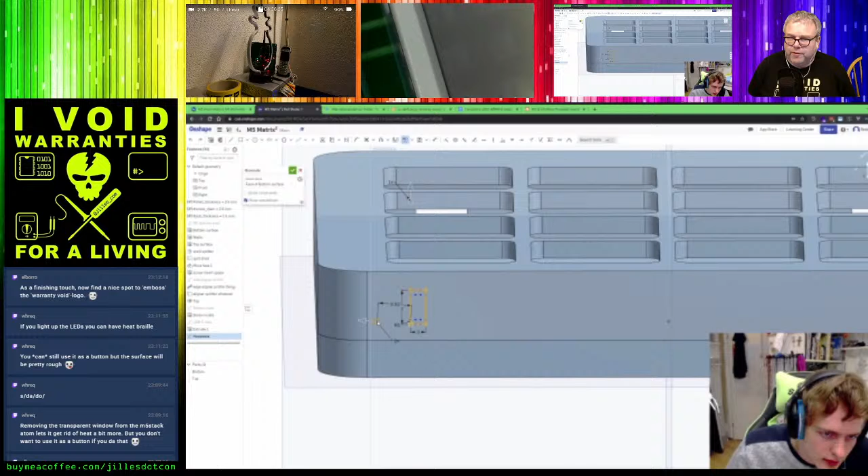Can you do it around the corner as well? I don't think so, I think we'll overcomplicate it. Yeah, this works with surfaces, and every surface - well, at least the surfaces you can draw on - they're all straight, as far as I know. And you don't want it on the curved surface where there's the screw section, so you want to also conceal that.

So let's see, will that fit, or do you need to make it a little lower, as you don't want it to touch the top of the surface? What do you mean? So if you look on the inside, does this not touch the... Oh no, it does not. Okay, cool, thanks.

So I think I'm going to leave it at this. Yeah, that's a group of 5, and then 5 for each LED, for each atom. Exactly, very neat. And then I can make just another pattern with spacing of 28, because 4 millimeters between the things, and then 24 for each. And then times 4. Ta-da! Patternception.

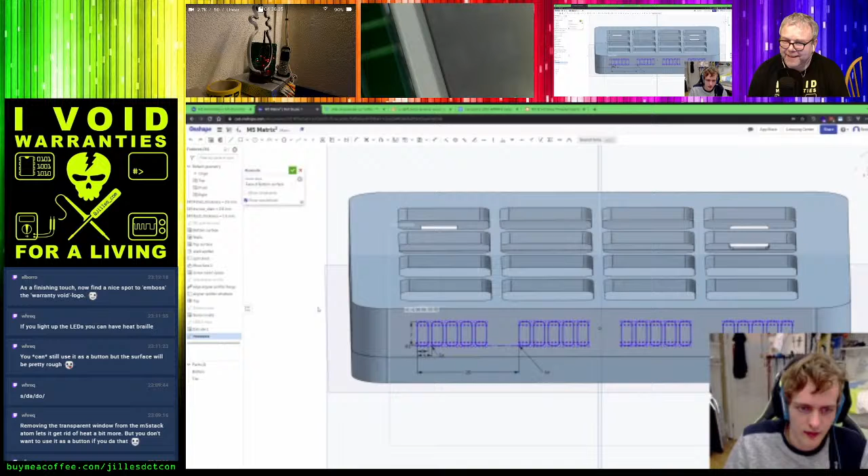Very fancy. Okay, now I need to add 2 construction lines to center them right here. Another one right here. I'm going to say these 2 are equal. And then we have surfaces we can extrude.

Wow. Is it possible to print transparent as well? Yes, depending on what kind of printer you have, it will be pretty or not so pretty. Transparent filament exists. Yeah, I don't think you should do this in transparent, because then you will see the screws as well, and I think it is much more neat. So something that resembles the color of the atoms, or a little bit darker or lighter, is very cool.

I might have access to an SLA printer soon. Oh wow. Those get a lot better results with transparent resin. Yeah, but then it might be a bit of trouble to get the inserts for the screws in there, because resin is not thermoplastic.

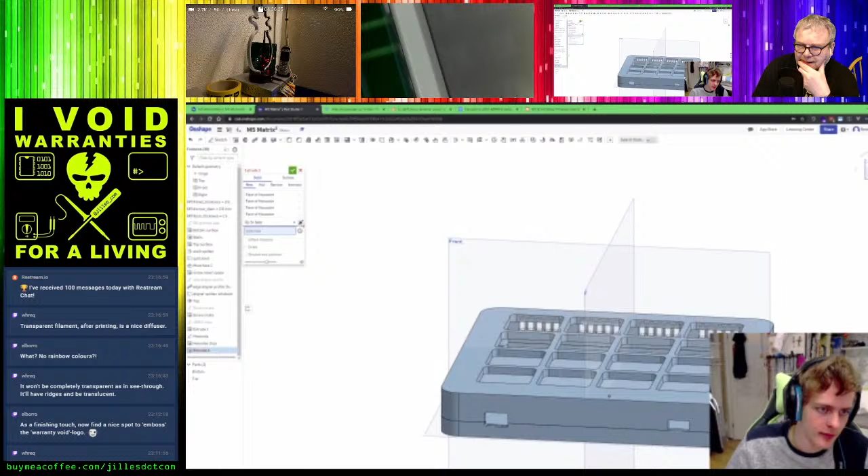Yeah, and then remove, of course, and have a second offset distance of - wait, what? Oh yeah, no, second end position, excuse me. And then up to the face as well, no, the other side. And that gives you more holes. Cool.

Now this gives you convection from bottom to top. Yeah, you can also make some in the side if you like. Yeah, would like to, if we could have the same ones on both sides. Okay.

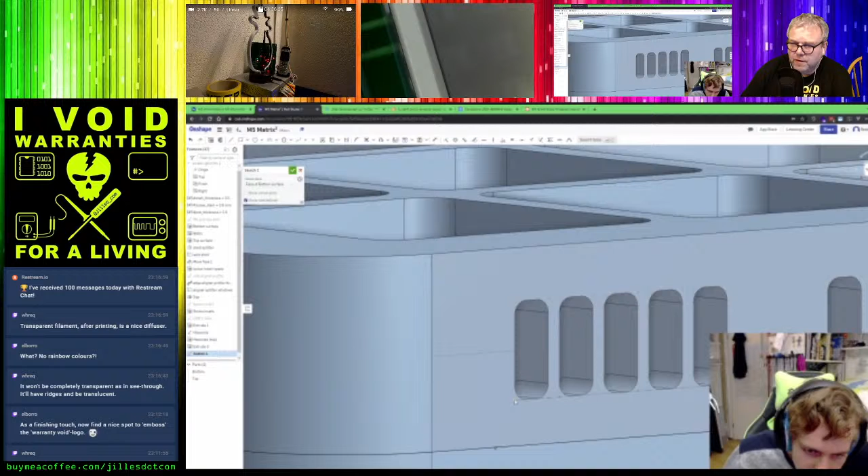Then I gotta make a sketch on this side, say, and then - no wait. And I need to steal one of these points for height reference. Yeah, so I'm just going to get this one and this one. Yeah, that's probably fine. Project them onto my sketch.

Albora is saying it looks a bit like magic to me. Very nice, I probably would just try to copy the entire pattern to the other side. That's what I thought as well. I might be able to do that. No, not trying to influence you, but why are you using one or the other? It's personal preference, or.

Actually, I didn't even think of it, so. Okay, we're just going to see if it works. Thanks for the suggestion, Rob. Yeah. See if it works. And then you extrude through the entire enclosure.

Aha, look at that. Does it align as well, or do you still need to align them? Yeah, you need to align them, but that's not an issue. And it is still a group. Wait, what? Oh, yeah, right. That's... Yeah, nice, very cool, yeah.

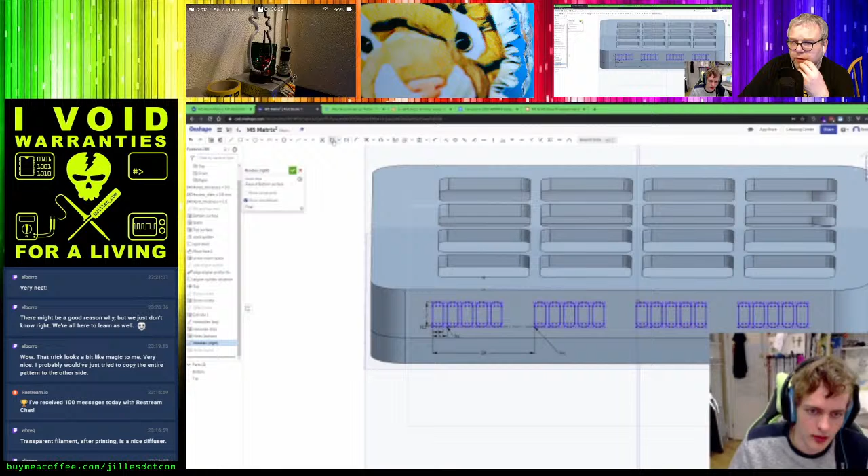Now let's see how to correct the placement of these, because apparently these are no use. They are aligned to the top part, not really, so I'm going to make another point on this. If you align the middle of this one to the middle of that, it makes it vertical. Yeah, perfect.

Look, it's behind the... but mind you, there's not going to be much light in here. Yeah, I was thinking that too, so you won't see that. I'd rather have it like all the same than not.

But you cannot extrude it then to the other side. Yes, you can, as long as you stop it in time, like I did with the other surfaces. Okay wait, you just select all of them and copy them to the other side.

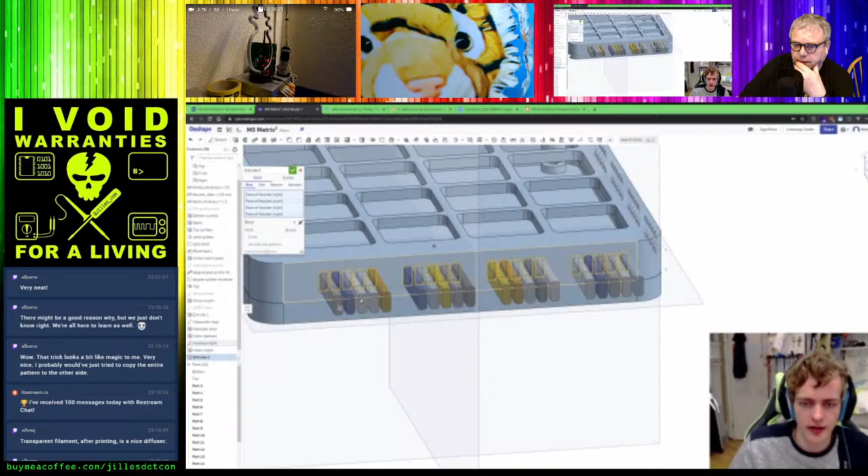Well, you just tell it to extrude up to a certain face. But you can also specify the start position. So in this case, it means just saying okay, I want to extrude up to the outside here, and the second end position is the inside. It will only extrude between those two planes, creating holes. Very cool.

And then, I think all the holes are in place. Yeah.

Could do some styling. Pwuts says, very neat, brilliant, but you can't extrude, hold my mate - instead of hold my beer. Good one, yeah, this looks amazing.

Okay, so can we do that here too? It's probably a bit too much. Oh yeah, yeah, that was what I was talking about, yeah.

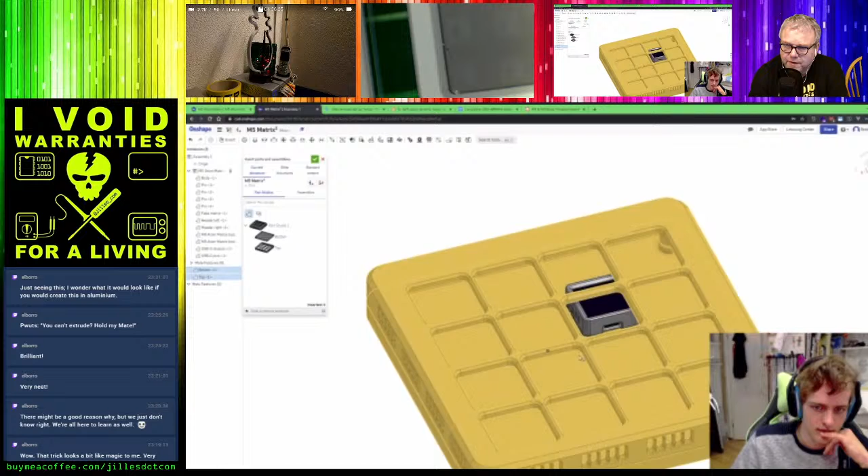Oh wait, this thing needs to be rotated, like that. Yeah. Oh, it's going hard. Then just freeze it - nah, okay. I'm going to align it with one of the holes.

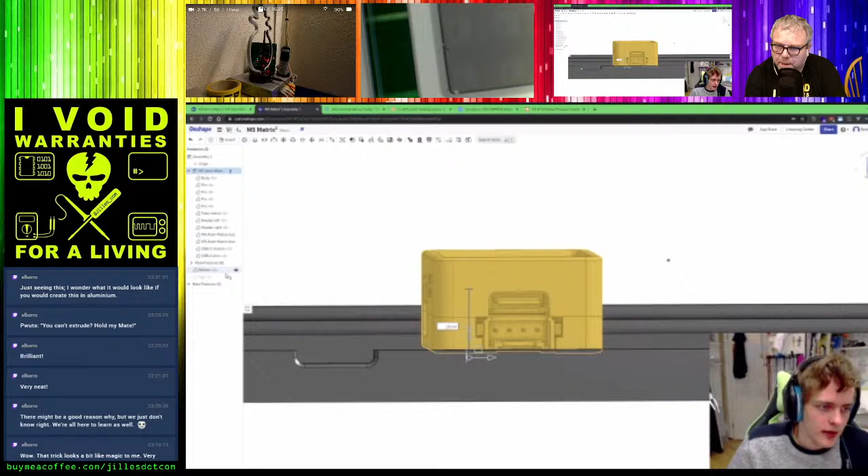Still too lazy to assign proper mating connectors, but whatever. Something like this, probably. Yeah. Then, okay maybe a bit higher. I don't know... oh yeah, it was not right on the board, there was this distance holder. Oh yeah, cool, makes sense.

Very, very cool. Could you make some snapshots and post them on Twitter? Yeah sure, does not have to be now, but yeah, you really outperformed my idea about what was going to happen tonight. So yeah, this is totally epic. Thanks, well done man. Now tell me, did it feel like most of the good-looking stuff happened in the last 20%?

If you wanted to make this a 15-minute stream, you could just capture the last part and speed it up a bit. But for me, the entire process matters - I wouldn't want to miss the earlier parts, especially where you run into issues and figure your way around them.

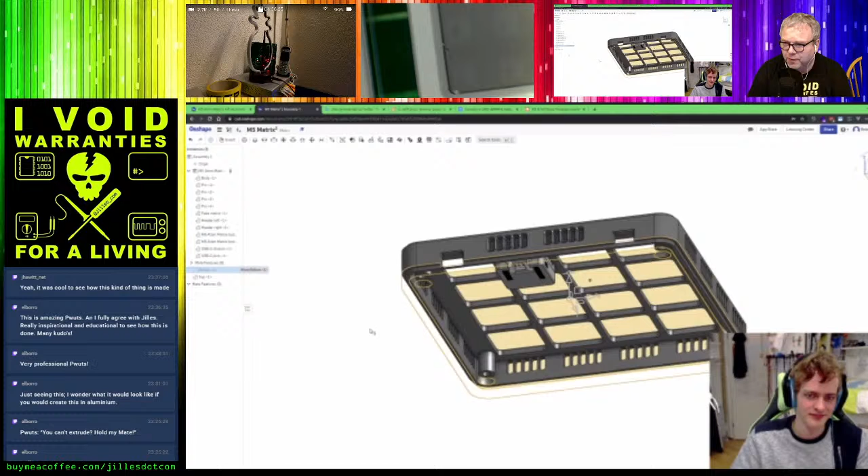Thanks for hanging along, I think you're doing a good job. Since you were already streaming, I think you should continue streaming as well. Just like Sebas hosts soldering streams, whenever you run into stuff or are building something, that's something people will want to see.

I was a little scared of doing this because it's a very long process, relatively, and not very spectacular until you get to the end and the details. This stream is like a 3-4 hour stream that's fit for these kinds of processes.

If you'd asked me two years ago, this would have taken me a whole day - partly because I was too lazy to watch tutorials and wanted to do everything myself. But it's still something you can get started with, and in the beginning it will be a lot of struggles and 'how the heck am I going to do this.' In the end you'll learn to break everything down into smaller steps, and if you can figure that out, you can make just about anything.

I started my career at an architect agency, where we had these Apple II computers to do our work, and we created an entire repository with all models so you could reuse different stuff. If you had a special setup with electricity or a kitchen, you could just take that out of your library and put it into your model to get a head start. Is that something you have as well - a repository where you already have things factory designed, like a Grove connector or USB-C, or ideas on how to fit stuff?